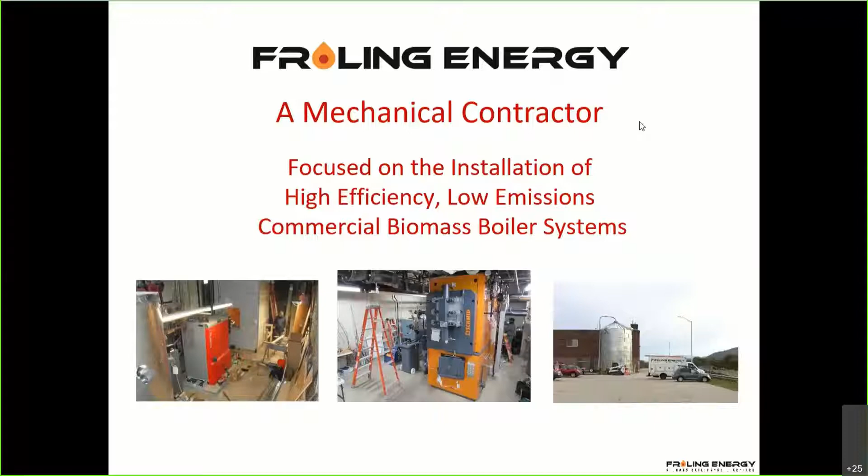First, I wanted to tell you a little bit about our organization. We are Froling Energy, based in Keene, New Hampshire. We are a mechanical contractor, able to do piping and boiler systems and that sort of thing, but our focus is on biomass boiler systems. The systems are not just any old boiler we can put in, but they're high efficiency, very low emission, and commercially oriented, although we do some residential work as well.

Our success has been on school buildings and campuses, that's where the majority of our big commercial projects are. We also do many commercial and industrial buildings - our biggest customer is an industrial campus over in Southwest New Hampshire. We also have some multifamily buildings, such as the Applegate Apartments over in Bennington, Vermont. We tend to cover most of New Hampshire and Vermont, and get into Mass and even Maine and New York State are possible, but our focus really is New Hampshire and Vermont.

We are a self-performing contractor. That just means that if it's a boiler system renovation that might include something like a boiler building and a silo, we'll take care of all of that - trenching to get a pipe indoors, running pipes through the building, that sort of thing. All that can be done. We aren't going to change your windows or anything like that, but we are going to be able to execute a good biomass system installation.

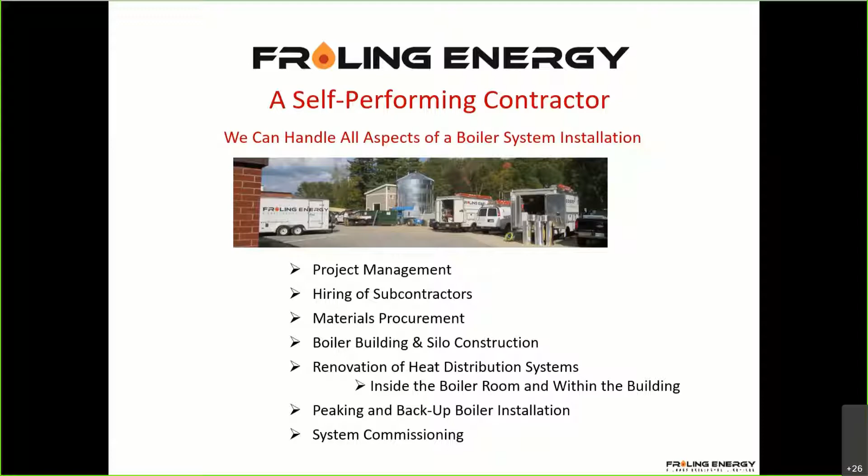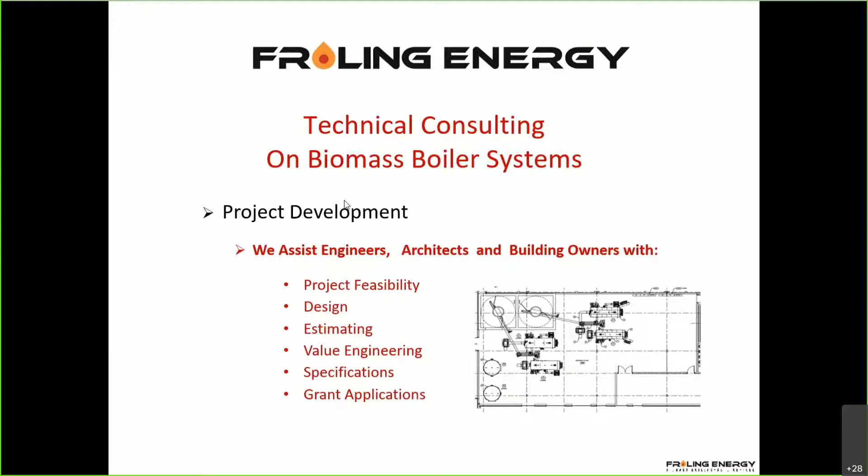Technical consulting on biomass boiler systems is something we do all the time, and we encourage people to give us a call, whether you're an engineer, an architect, a building owner, or just a person with ideas about their community or some particular buildings that they might be involved with. We're very happy to talk to you about it and talk about feasibility, as well as getting down into the specifics of that project to see if it's feasible, to see if it can be value engineered into a better system and so forth.

One of the things we've done here is, we saw wood pellets and green wood chips were out there 10 years ago - that's all you had access to. About 7 years ago, we decided to bring this European idea, which is a dry wood chip. It's just a slightly processed wood chip - we screen them down to about the size of a matchbook, and we dry them to 25% moisture content. It is bole wood, so it's very much a pure wood without much bark and certainly no leaves or anything like that. We deliver them by blower truck, which is part of the innovation - they can be delivered in a big semi and put up into a vertical silo, which is a very economical way of storing and feeding chips into a boiler system. So all in all, it's worked out very, very well, and there's nearly 20 systems out there right now in New England using these chips.

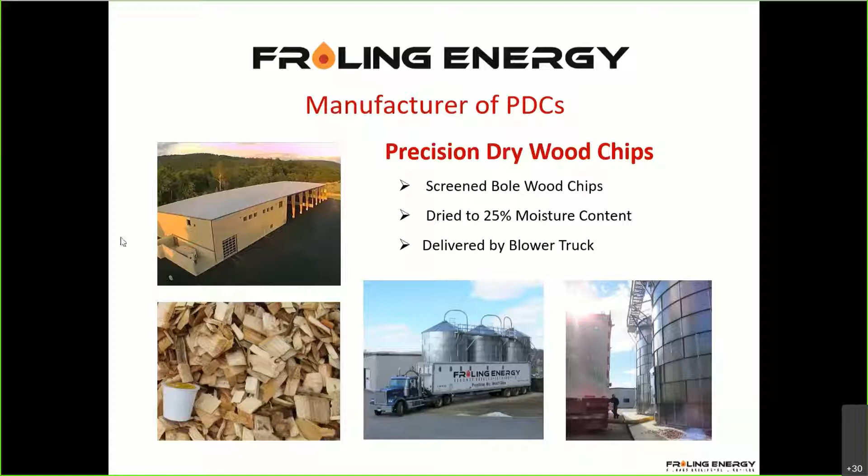So today we're talking about biomass with clients and stakeholders. That is, if you were needing to speak to someone about biomass with your clients and stakeholders, this might give you some ideas about that.

Jeff Rubin is going to be doing this presentation. He's a writer, educator, real estate investor, and a passionate environmentalist. After a 30-year career in marketing and communications, in 2017 he founded sustainableheating.org with a team of experts in the field of climate and heating, finance, and branding. This website is dedicated to helping people make climate-smart heating choices - if you haven't been there, you should go, a lot of good information. Jeff's an award-winning creative director with over a decade of experience running the marketing efforts of a wood pellet boiler company, as well as an admitted heating geek, and he holds an HVAC certification with an endorsement in wood heating. Through his combined backgrounds in communication, real estate, contracting, behavioral science, and heating technology, he's got a unique perspective on the challenge of simplifying these complex, disruptive, and climate-critical issues inherent in clean heating. So his talk with us today is all about how we can play a vital role in moving America towards our needed clean heat future.

Welcome. Thank you, Jim, and thank you to all the people that dialed in today. It's a terrific turnout, I'm so happy.

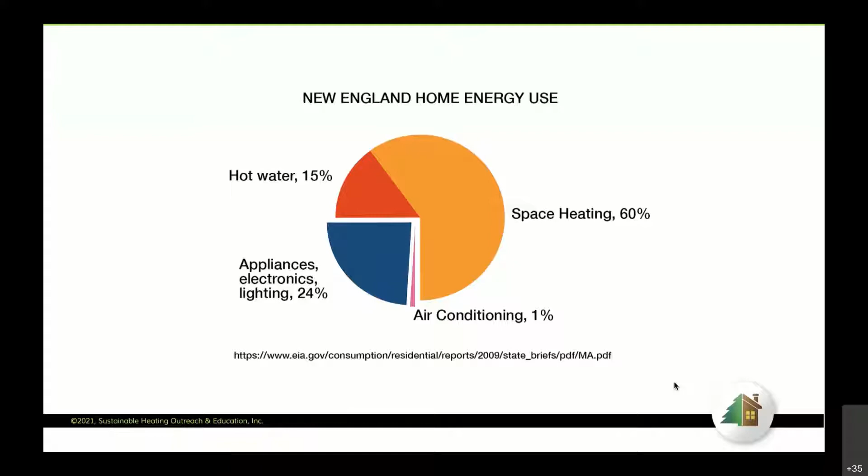You know, I need to take a side trip here for a minute. The words we use matter. Do we have to say building thermal? I think our industry is better served by just saying heating.

We have a lot of jargon in this industry, and I think it gets in the way. We need a bumper sticker—and I don't mean a literal bumper sticker—I mean a short, concise, compelling way to speak to people.

When your clients are considering a green energy investment, what makes the biggest dent in their carbon footprint? Solar, transportation, or heating? Up here, it's always heating.

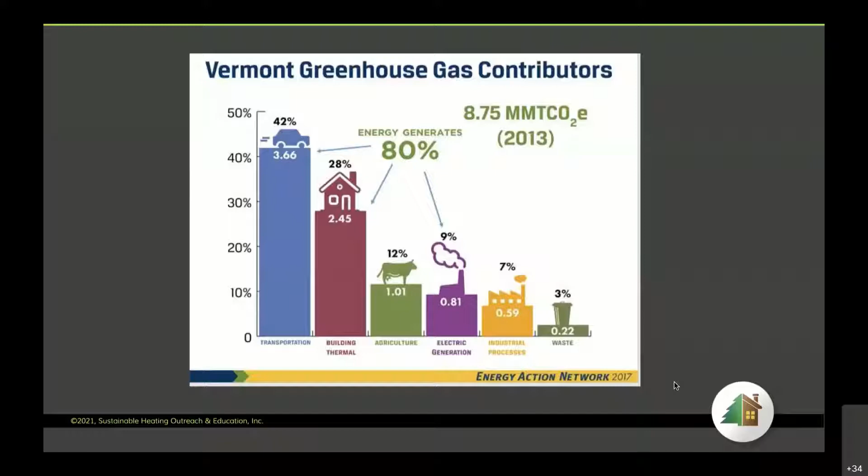So here's some context: how clean can we really heat with today's available, practical, affordable heating technology? When it comes to heating New England homes, we're not able to get to carbon free, and even carbon neutral is going to be a stretch. That's not an opinion, it's the physics of heating.

First and foremost, we need to help our environmental brothers and sisters understand the basics of heat loss geography and thermodynamics. The world is not a perfect place, and we cannot wait for the perfect, even if it's on the horizon, in terms of our real world, practical, affordable options. Waiting for the perfect is the path to climate catastrophe. We need to reduce climate impacts from heating with current technology that's available now. As they say, we don't have 10 years to wait.

Every decision to install fossil fuel systems now will be adding geologic carbon to the atmosphere for the next 25 years, because that's how long a heating system lasts. This is urgent. Today's decisions matter. We need to do better now.

And I can hear the questions, right? What about solar heating? What about geothermal heat pumps? And by the way, can we please call them ground source heat pumps—geothermal is what they have in Iceland, but I digress.

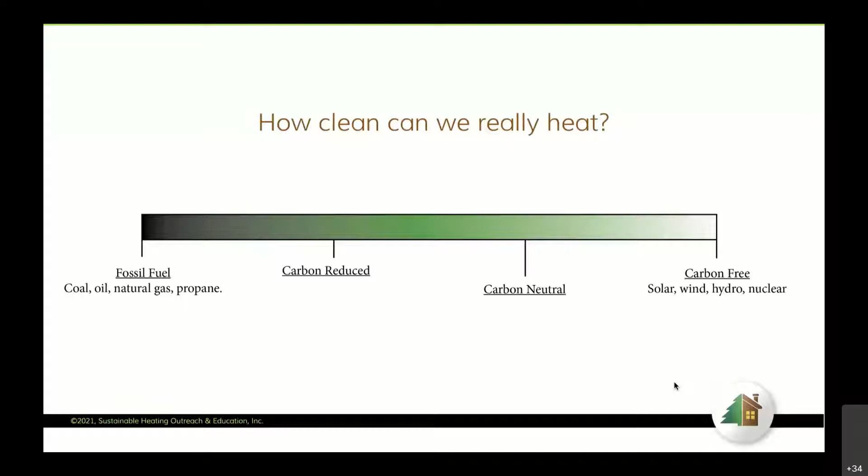I wish it wasn't so, you wish it wasn't so, but that's the reality, and this is too important for wishful thinking and academic exercises into technologies that will be here one day. Now, I suppose you could do some radical, expensive building modifications to super insulate the building envelope, but that kind of budget and disruption of ongoing building operations is not going to be an attractive option in most cases.

Now also consider that the need for combustion output temperatures is particularly leveraged compared to heat pumps in commercial applications, right? Because in commercial applications you find big spaces, big loads, and lots of mechanized forced ventilation that increases the heat loss.

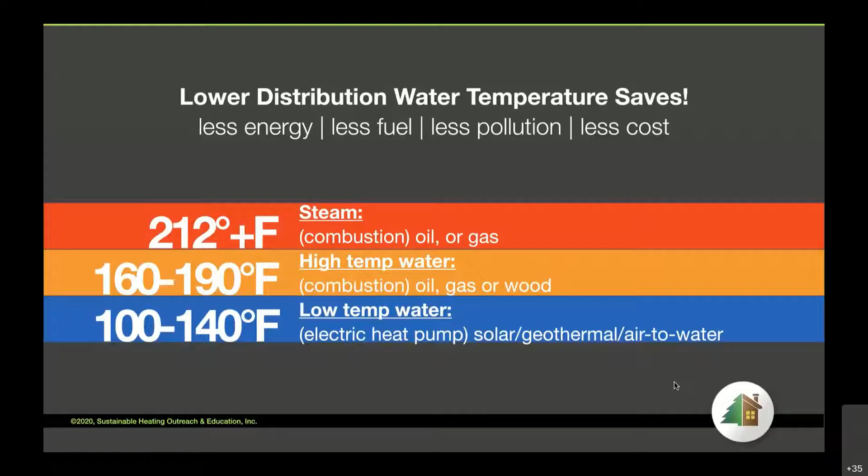So what this means is that on the coldest 4 to 6% of days—not very many days—you're actually using 15 to 20% of your annual heat load. On a very small amount of days, you're using 20% of your heat load.

Now it's true that a brand new building can be super insulated to operate well with a ground source heat pump, but the systems are expensive and they need to be ready for potentially very high electric bills and mechanical service costs, and that can add up fast due to the complex nature of these systems.

But for retrofits, it's even harder. The principle of practical incrementalism—thank you, Jim—makes clean, renewable wood chip or pellet systems easy to justify. If there's an existing distribution system in the building, then the least cost approach is to maximize insulation and weather sealing and keep using whatever's there.

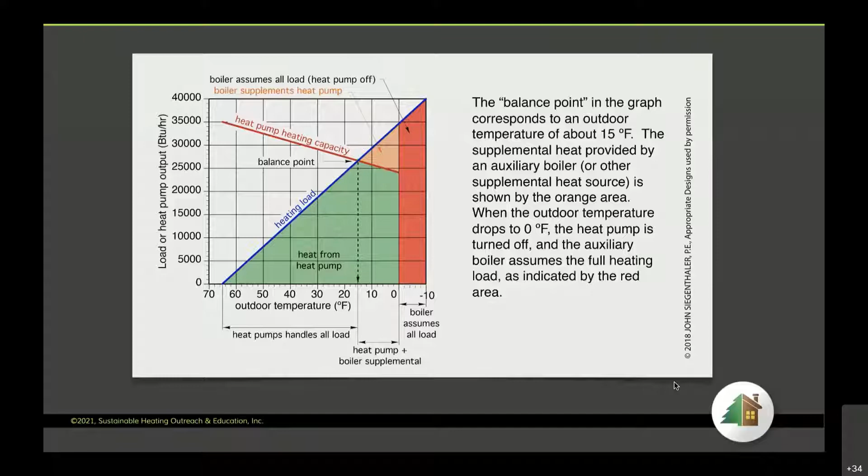My argument is always that here in New England, where it gets really cold, you need combustion. And that limits our choices to oil, gas, and wood. Only one of those is renewable—but gas is clean, right?

What's the biggest trend in heating today? All over this country, oil boilers and furnaces are being replaced with ones that burn natural gas. Little problem: natural gas is a huge lie.

When you combine both carbon dioxide and methane, natural gas is as bad as coal. And according to the U.S. Energy Information Administration, the EIA, 5.7 million homes still heat with oil.

About half of them are going to need to be replaced over the next 10 years. And the kind of world we leave for our children hinges in large part on how we handle those replacements. We, on this call, have an opportunity to counter this. Whenever we open one new mind, we leave the climate a little better for our kids. So I encourage you to speak up. Natural gas is as bad as coal, and people need to know that.

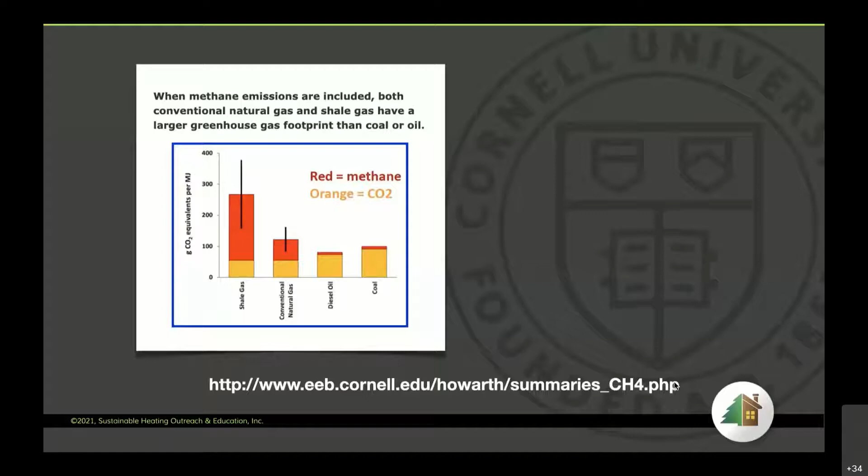But let's say price is no object. You've got the solar fields to balance out your heat pumps. Do we get to carbon-free heating that way? PV solar is designed to produce extra, send back extra in the summer, but it draws from the grid in the winter. Over the course of a year, your solar production and heat pump combination is designed to be balanced, so that means we are cost neutral, terrific. As long as your solar panels are on site, you're also carbon neutral, or even better.

Fantastic, right? Terrific. The question is, are solar panels carbon free? And I'm not talking about the whole life cycle accounting, the manufacture and installation and transportation. I'm just talking about the energy that powers your site-specific heat pumps. Is that carbon free? Well, with or without solar panels, during the winter, you're pulling electricity from the grid to run those heat pumps. That huge chunk of energy we need for heating has to come from somewhere.

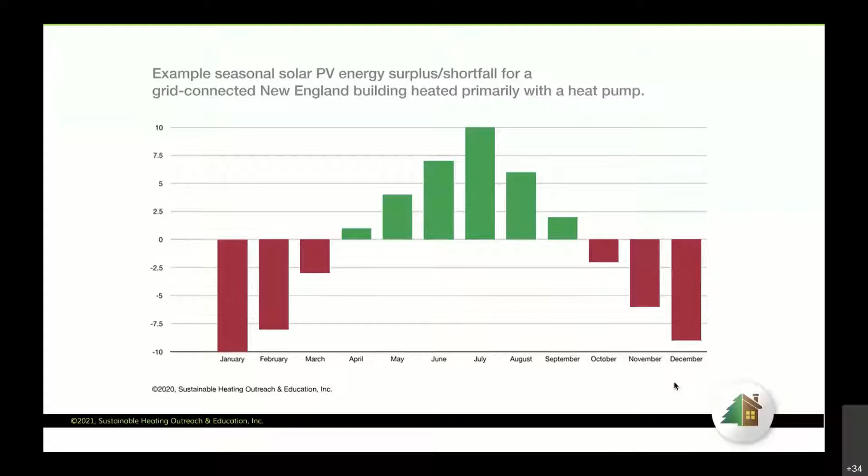31% of annual US carbon emissions comes from electric generation, mostly coal and natural gas. We know natural gas is bad. So that's 31%, a third, compared to all the transportation, all the industry. This single chunk of heating, of electric, is huge.

Now it's getting cleaner, but getting rid of that last 2/3 of fossil fuels is not going to be easy. The fossil fuel interests stand to profit, are you sitting down, $33 trillion by maintaining the status quo and continuing to extract geologic hydrocarbons for the next 25 years. That's their plan: take it out of the ground, put it in the atmosphere. These richest companies in the history of money are using their immense resources to create a global disinformation campaign.

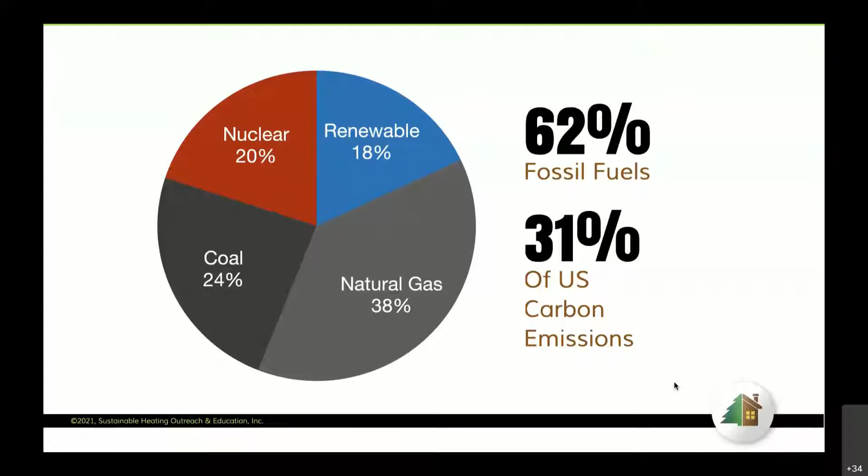And I want to call your attention to a behavioral construct called the bystander effect. Gasoline from algae, sounds great. Jet fuel from garbage, terrific. The bystander effect says we've got this and you don't have to worry about anything. It's all designed to lull us into complacency.

Now, some people talk as if electricity is the magical, clean, holy grail just because they don't see the combustion on their site. If your local grid is mostly coal, it doesn't matter if you ponied up for a Tesla. You're driving a coal-powered car. How do people not get that?

Well, the answer is advertising. The answer is the bystander effect. The answer is we all just want to believe we're doing the right thing. And I think the anti-biomass forces are good people who deeply believe they're doing the right thing, and in many ways they are.

But isn't getting to the cleanest possible heating solution something we should all be able to agree on? We are not going to solve the climate crisis without dealing with the heating sector. Maybe it's just that no one's taken the time to detail the full picture of the real-life limitations of today's heating science. These people all have heating systems. What do they heat with? You and I, in this call, have the opportunity to make a real impact by making the complex nuances of heating simple for the layperson.

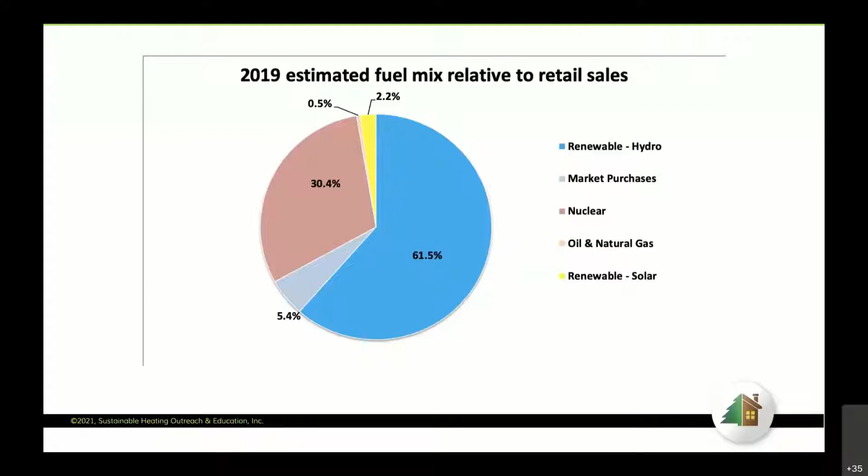Well, anyway, if you find yourself in the enviable position where cost is no object, I think the absolute best climate option would be solar-powered heat pumps for air conditioning and heating in the shoulder seasons, combined with a pellet or chip boiler to cover the heating load when the heat pumps can't keep up with heat loss. That solar heat pump, pellet or chip boiler combination leads to the lowest overall emissions we can get to here in New England. One last point about electricity.

A lot of the anti-biomass rhetoric is about using trees for electric generation. And I listened to an interview on PBS with the filmmakers of Burned. For those of you in the room who know, Burned is a very anti-biomass movie. Anyway, the filmmakers didn't really have a problem with heating. They were asked about this specifically. I think they just didn't think about it much.

They never intended to conflate heating with electricity. We need to decouple clean renewable heating from biomass for electric generation. Clean renewable heating is 80-90% efficient with no other better choices, while biomass for electric generation is only 25% efficient, and we have lots of better choices there.

This gives us an opportunity to validate our critics. Our values are actually very aligned - we are all threatened by climate change. We agree there are better, cleaner ways of creating electricity than using biomass. But when it comes to heating in New England climates, our only practical and affordable choices are oil, gas, and clean, renewable, plentiful waste wood.

That's just the reality of the current state of heating technology. So think about that - what other options do we have? We're going to heat our buildings and there's no free lunch. Our choices come down to oil, gas, wood pellets, wood chips. If we don't get heat from the biogenic cycle, the only other option is digging up and releasing geologic carbon, which adds to the total carbon dioxide in the atmosphere - that's a big part of how we got in this mess in the first place.

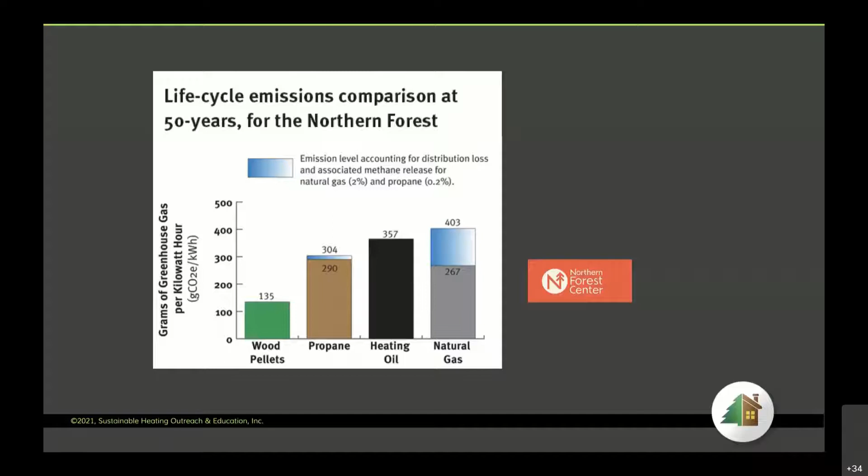We can't afford to rely on the concept of the electrification of everything - we're just not there. Here's another graphic I carry on my phone: switching from an oil boiler to one that runs on clean, renewable wood pellets gives a homeowner their greatest potential carbon footprint savings - twice as much as a Prius and 3 times more than solar panels.

This is residential, but it's leveraged for commercial too. I'm just showing you the top of this graphic - this is a full page of data. We laid out exactly, we show our work, exactly how we calculated these numbers. You can find this on our website pretty easily, or I'll send it to you if you want it. It was done by Adam Sherman at the Biomass Energy Resource Center. The real carbon savings we came up with was closer to 9 tons, but we want to be conservative.

Now, I know most of you work with commercial facilities, but people learn through stories, so here's a simple story - a residential story that makes the point. Dick and Jane are committed to doing everything they can to leave a healthy climate for their kids. They saved about $3,000, and their local bank offers low interest loans for green projects in the $20,000 to $30,000 range - that'll buy you solar panels, a hybrid car, or a wood pellet boiler. For that kind of money, what's their smartest play? Well, it's a no-brainer.

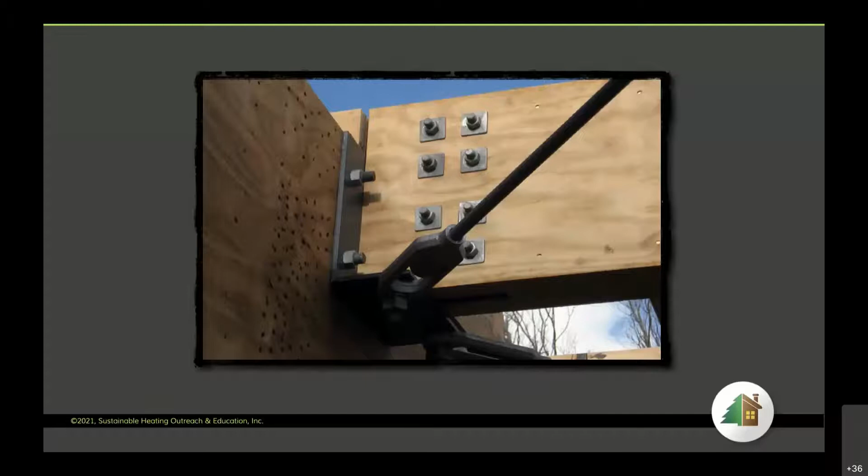So sequestration and substitution of fossil fuels are 2 vital reasons we need some forests to be working forests. But that good carbon magic that a tree does is limited. That part of the tree that can be used for making stuff and sequestering carbon, that's only about 20% of the tree.

That high grade, that's where the money is for landowners, those high grade saw logs. But it's markets for low grade, the leftover other 70 or 80%, that drives responsible, sustainable forestry operations. And if we hope to protect the country's private forests from development, we need to find a replacement market for that low grade pulpwood.

It used to be used for making paper. We all know how many mills have closed, the money lost, the jobs lost, the communities lost. We can rebuild those markets with wood heat.

And we also help landowners resist the lure of profits from development, and we incentivize forest conservation. It sounds like a win-win to me.

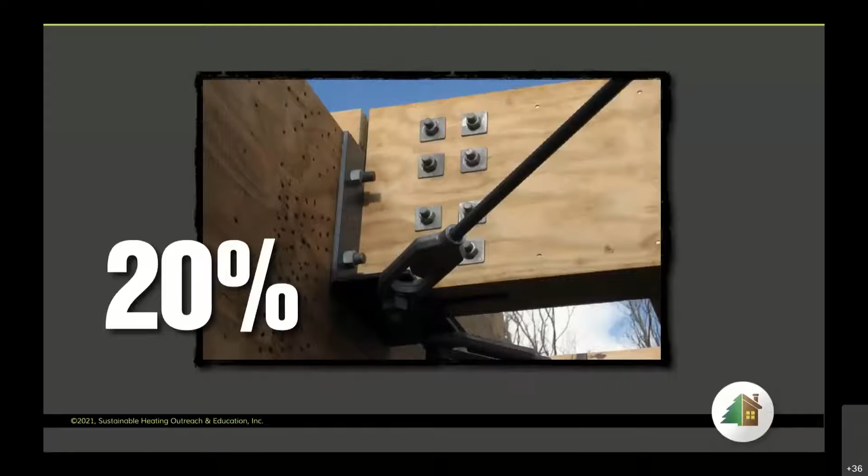But that still leaves one big question from our Vermont Digger letter. To quote: wood is not an instantly renewable fuel source. It takes 50 to 75 years for a newly planted tree to grow to its full carbon absorbing potential. Our carbon dioxide emissions need to go down now, not 50 years from now. I absolutely agree.

First of all, trees don't wait 50 years to start sequestering carbon. In fact, the rate of sequestration is front loaded. Take a look at this graph. The majority of carbon sequestration happens in the first years of growth, and that rate levels off over time. The point is, young trees are actually our fastest carbon absorbers.

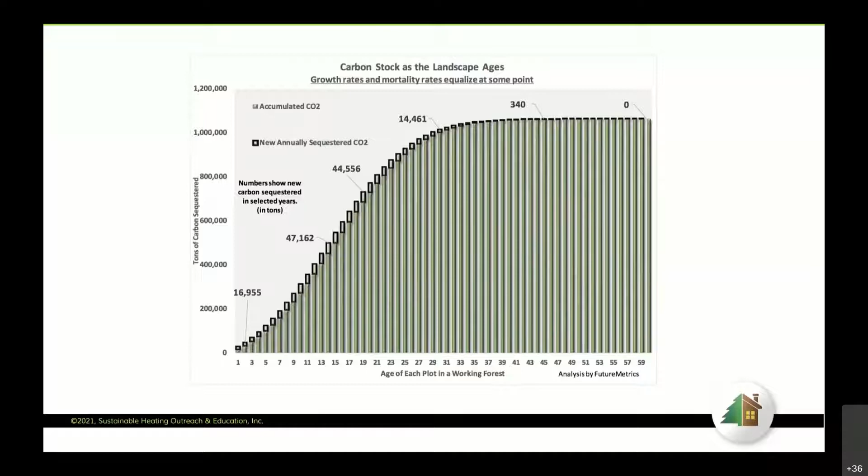So I need to credit Dr. William Strauss at Future Metrics for this graphic, and this next part of the carbon sink timeline is from Professor Malmsheimer, so thank you. It's counterintuitive, but the sentiment that we only have 10 years, and that's why we shouldn't cut any trees now because we don't have 50 years to recover that carbon, that's exactly what will lead to dangerous levels of deforestation and CO2 in the atmosphere.

The 2007 Intergovernmental Panel on Climate Change Assessment states that long-term cumulative CO2 emissions, the emissions that are always reduced by using forest biomass to produce energy, are correlated with projected peak global temperatures. So if we want to limit global temperature increases to 1.5 degrees centigrade or 2 degrees centigrade, we need to use forest biomass, because doing so reduces long-term cumulative CO2 emissions.

Managed forests continue to grow and sequester carbon, and removing select trees from overcrowded stands can release the residual stand and increase the amount and quality of wood grown and the amount of carbon sequestered in subsequent years, as compared to a stand that's not thinned. In the long term, a sustainable forest management strategy aimed at maintaining or increasing forest carbon stocks while producing an annual sustained yield of timber, fiber, and energy from the forest will generate the largest sustained mitigation benefit.

Boilers have a 20 to 25 year life. Buying one today is a commitment to buy that fuel for the next two decades. Our most vocal climate change activists correctly state that we have just 10 years to act before some big environmental changes happen. What should we use? Oil? Gas?

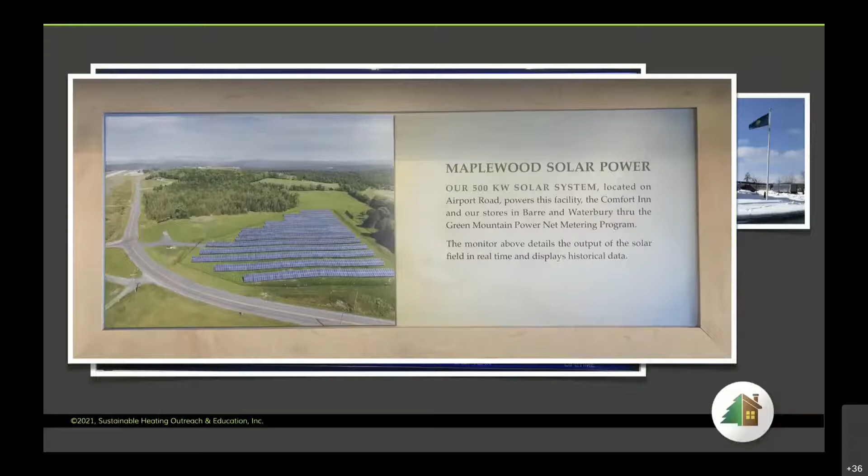Well, look at the size of that solar field. I can't help but wonder, was this really the most efficient way to go? Even with all these panels, don't you think they were still pulling power off the grid with wind chills in the 20 to 30 degree below zero range?

Anyway, the point is, we can tell that story too, and we're almost there. This display is a Froling display that shows the operations of a heating plant. All we need to do is add real-time carbon savings data to the display they already have, right? We can add that comparison data based on BTU output. It'd take somebody smarter than me, but I'm sure we can find an IT person with the skills to add that to the display.

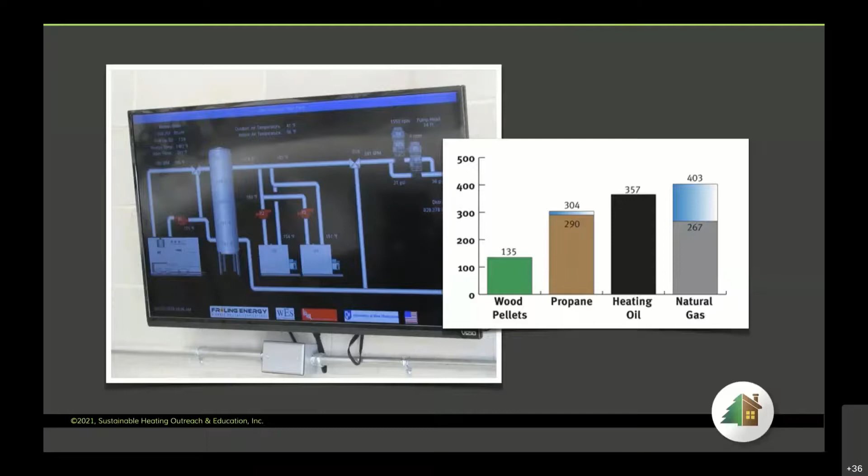So we talked a minute ago about Burned the Movie, and this is something going on that I don't understand. We have smart, concerned environmentalists that make movies like Burned, which, in terms of heating, is leading us in not a good direction. And then we have this Upper Valley group that's being very successful in their messaging against biomass.

The Massachusetts incentives went away. New Hampshire incentives are under attack. In Vermont, they just sent the movie Burned on email to all registered Democrats. Same thing with the Professor Moomaw Proforestation Standing Trees Vermont Zoom. They are being successful. They're good communicators.

You and I together on this call have an opportunity, maybe even a responsibility, to be at the vanguard of truth around the science of heating and the science of climate. We must not conflate wood for dirty 25% efficient electric generation with renewable 80 or 90% efficient wood for heating.

I had a note on this. It seems to have gone away.

I actually saw a PBS presentation after they showed a screening of Burned with the filmmakers, and they were asked specifically about heating, because Burned is all about electric generation and how bad biomass is for that. They were absolutely right about that. But when asked about heating, they really didn't have anything to say. I don't think they ever intended to conflate biomass for electric generation with clean, renewable wood heating.